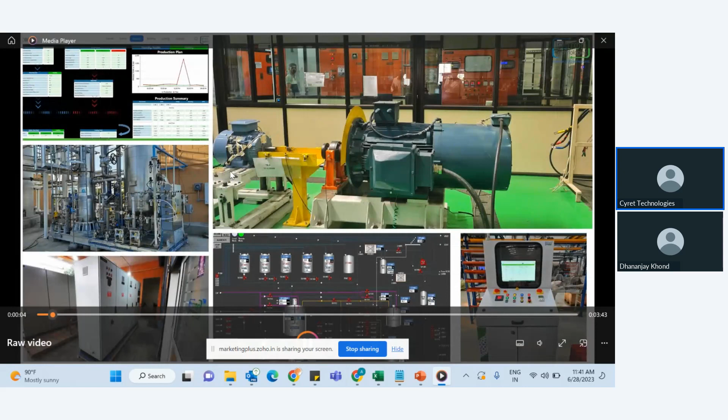Products and solutions for domestic and international customers, for manufacturing industry, for process industry, and also research laboratories. And we could do this because of our in-house cross-domain expertise, rich experience, and dynamic team.

Instron was incorporated as a proprietor firm in 2013, and Instron Technologies LLP was formed in 2016. Based out of the industrial hub of Pune, Maharashtra, we have served 200 plus reputed clientele, and now we have incorporated Instron Technologies in Canada to serve the North American market. This makes us an MNC with Indian origin.

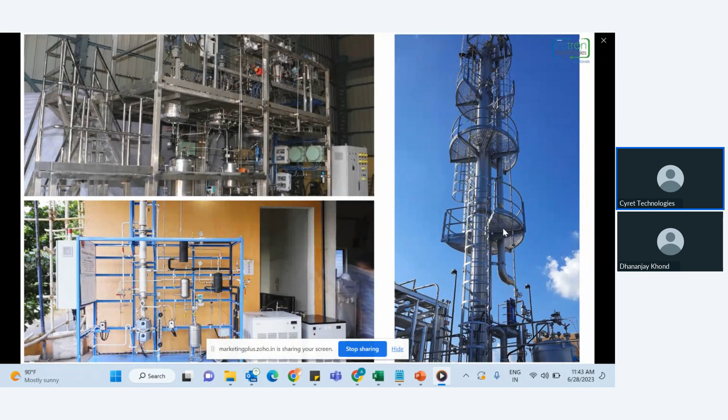Instron Technologies offers products and solutions into three verticals: process plants, digital factory solutions, and test systems. In process plants, we help customers right from conceptualization to detailed engineering and also complete plant supply and installation.

In digital factory solutions, we help customers monitor their critical parameters on the go by offering systems right from sensors, communication with existing PLCs, and then giving authenticated data to empower the decision makers. And in test bench systems, we provide end-of-line and performance evaluation test benches for, say, electrical motors, appliances like refrigerators and ACs, and thrusters, etc.

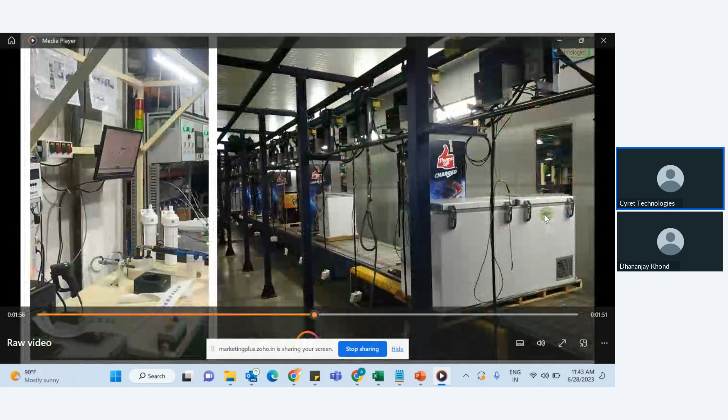Our strength is our in-house expertise in automation, IT, chemical processes, and mechanical design. We leverage it to discover unmet customer needs and provide turnkey, tailor-made solutions. Our solutions have helped clients enhance their production and efficiency to achieve their sustainability goals.

In order to accomplish our motto, let's grow together, we strive to foster a family-like environment within our organization. This has aided in strengthening the bonds between team members, instilling a sense of responsibility for all we accomplish, and increasing employee retention over time.

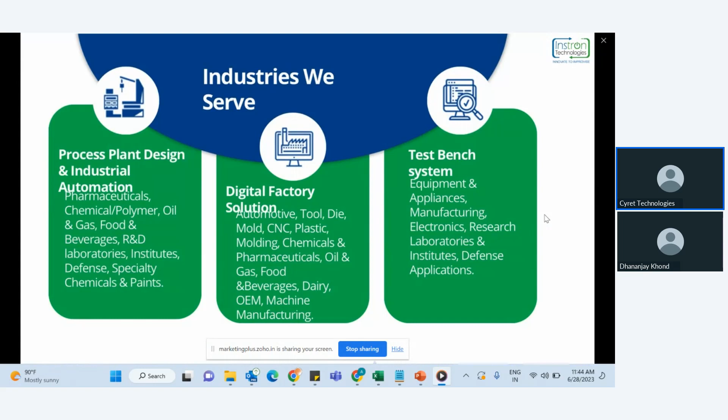We at Instron Technologies innovate to improve operations of customers worldwide in manufacturing industry, process industry, along with research laboratories, to be a known face in specialized products and solutions in Indian industry, in process plant systems, digital factory solutions, and test bench systems. We offer integrated solutions for various industries.

We have been recognized as one of the 10 most promising industrial IoT solution providers. We are ISO certified, and we also got selected for DRDO Technology Development Fund and iDEX Initiative. With this, we look forward to expanding our expertise in Canada, Australia, Sri Lanka, and Thailand. We have developed a young and dynamic core team and execution teams to help achieve the organizational goals. We strive to achieve the philosophy of growth at individual level and also at organizational level, which is why we have leaders in our organization guiding day-to-day decisions.

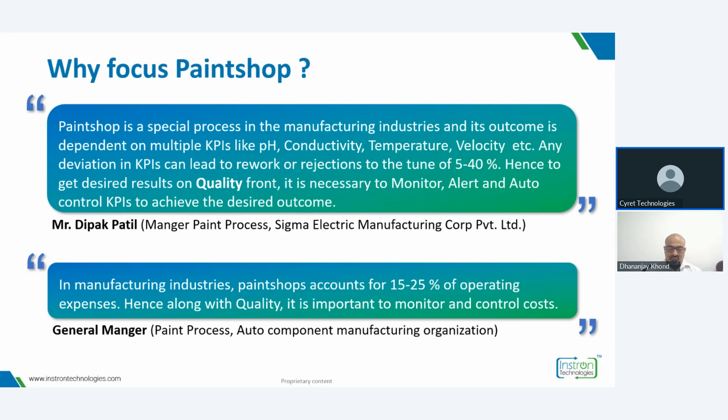There is one more industry expert who is anonymous, and he is the general manager in an auto component manufacturing company. In manufacturing industries, paint shops account for 15 to 25% of operating expenses. Hence, along with quality, it is important to monitor and control cost. So there is a balance of quality as well as the cost part of it. That's why we thought of taking today's discussion around paint shops, and how the latest trends and technologies can help users improve their paint shops.

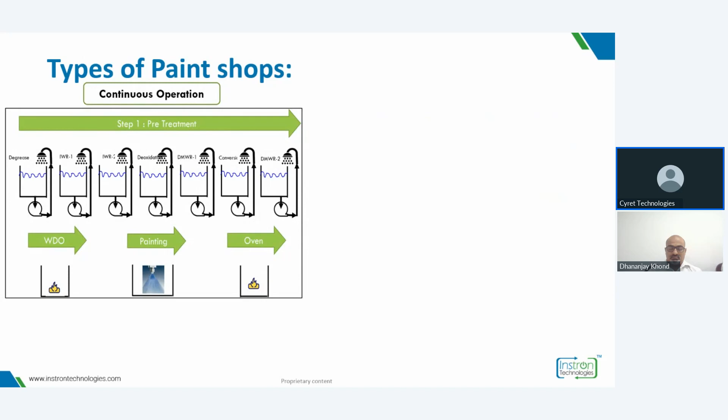To start with, we wanted to highlight the different types of paint shops we have come across. Typically, we try to distinguish these paint shops into continuous process or batch process. The difference is, in continuous process, the components to be painted are mounted on conveyors and they flow seamlessly from the first tank of the pre-treatment to the last tank of the pre-treatment, and from there it goes to the water drying oven, painting, and then baking oven.

As against that, in the batch process, it's a basket in which all these paint components are mounted, placed, and then this basket is moved from one tank to the second to third in a predefined sequence. And as usual after that, there is water drying, painting, and oven, depending on the process that particular company goes through. So these are the two major differences, or two types of the paint shop.

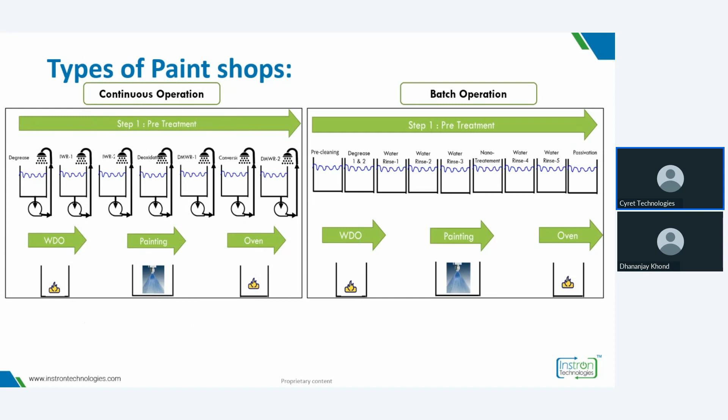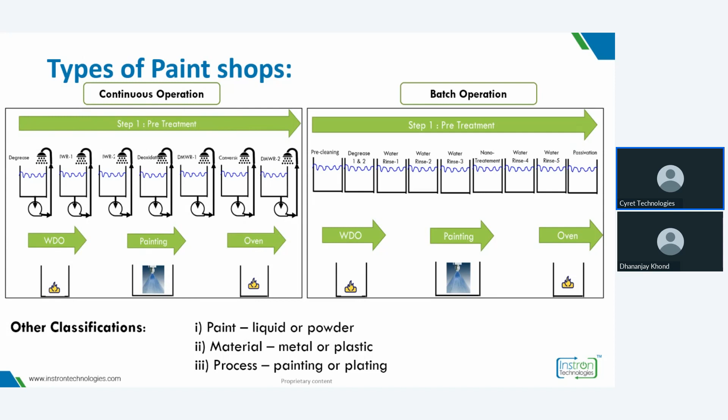Apart from that, other classification criteria could be the liquid or powder to be used for the paint shops, the material on which the paint is to be coated, which is metal or plastic, and one more criteria could be whether it is plating or painting. There may be many other types, but having gone through all these different types of paint shops, what we have understood is the critical parameters for the paint shop.

Paint shop can be classified into three segments: pre-treatment section, painting section, and baking oven section. For all of this, the critical parameters can be divided further into quality parameters, costing parameters like the utility, and productivity parameters. As paint is aesthetically important, quality is the first and foremost parameter, so we have taken it first in the sequence.

For example, in the pre-treatment section, what is important from the quality point of view is pH, conductivity, and temperature. If it is a batch process, then it is dip time. And if it is a continuous process, then it is the water spray pressure.

These are a few of the parameters. There could be many more varying from customer to customer based on their pain points. But moving on to the painting operation, the critical parameters from a quality point of view are air pressure and gun program. For the baking oven, it could be the temperature of the oven, conveyor speed, and temperature of the flue gas.

So these are the quality parameters. I'm sure most of you will agree that one or two of these are applicable for all of you, and there could be a few more. But apart from the quality parameter, there is a second one, which is the costing part, the utility consumption. So what are the typical utilities across the paint shop?

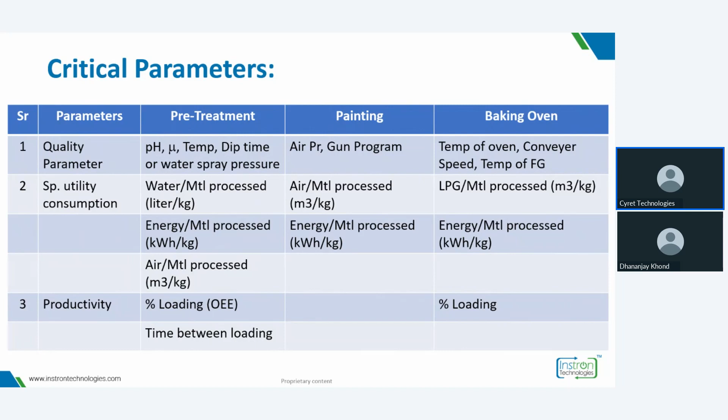So in terms of the baking oven, what is my percentage loading? That is another parameter. So these are the different critical parameters in pre-treatment, painting, and baking oven sections for quality, costing which is utility, and productivity parameters. I'm sure you will have a list of a few more parameters, but yes, these can be relevant for the individual customers we come across.

Now, moving to the next step, during our initial observations across different manufacturing and auto ancillary industries, what we have seen is these critical parameters are measured once or twice in a shift. And that is very much true for tier 2 and tier 3 customers, users of the paint shop.

So what are the methods they use to measure these critical parameters? Very simple or basic methods like litmus paper, the titration method to measure concentration, the temperature gun or display, and pressure gauges. As you can see, most of these are analog devices, and people can see the local display of that.

If any of these parameters deviate and are ignored, it leads to complete rejection or rework, hence a loss of man, material, and money. For example, if you measure the pH of a particular tank, let's say it needs to be between 4.5 to 5, and you measure it at the start of the shift and dose a chemical accordingly to maintain that range.

What happens until the next measurement, over the period of 8 hours, is during the course of production this chemical gets depleted and your pH deviates. Because of this, you will see paint defects, and what it means is you had spent so much man, material, and money from foundry to the machines, finally bringing it to the paint shop, and just as you are about to invoice, there is a rejection. This rejection, to the tune of 5 to 40%, is a big loss for any company.

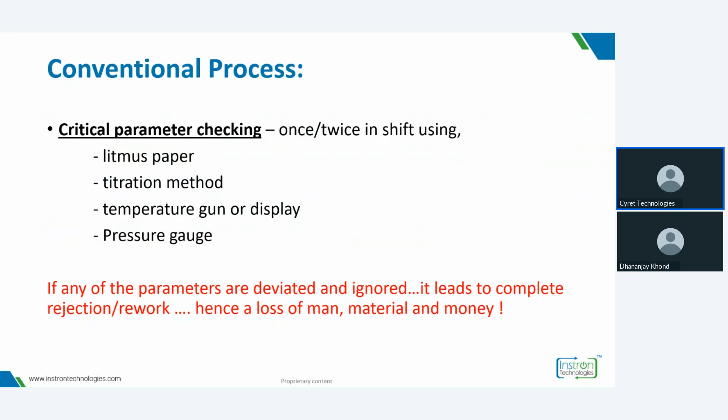So what can be done? What can be done with the help of this latest technology, or the traditional technology along with the latest technology, is you can use this IoT based system. So what is this system?

This system, as you know, Paintshop is an amalgamation of different systems like pretreatment, baking oven, paint shops, all supplied by different vendors. All of them may be automated, all of them may have PLCs and HMIs, but the problem is they are not talking to each other, and that's where the IoT system can play a good role.

So what we are saying is your existing automations like PLCs or HMIs can come to the gateway panel. And along with that, based on our surveys and discussions with your team, we can identify the pain points.

The pain points could be solved with the help of some additional sensors like pH sensors, conductivity sensors, temperature sensors, weight measurement sensors, air or water flow sensors, and so on in the pre-treatment zone. Apart from that, in the furnace zone it could again be weight sensors or gas flow measurement, speed, and kWh.

And in the powder or liquid coating section, it could be weight, air pressure, gun program, and limit switches. So any additional sensors along with your existing system can talk to the IoT gateways, and from the IoT gateways all this data gets stored into your server.

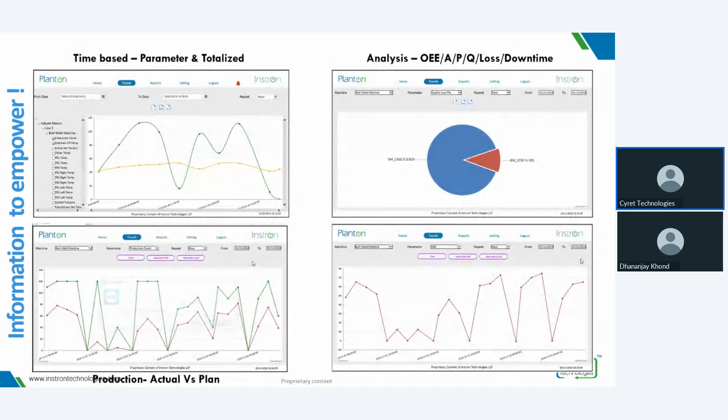So what could be the benefits? He can use it for root cause analysis, multiple trends, like one parameter versus a second parameter, and all of that.

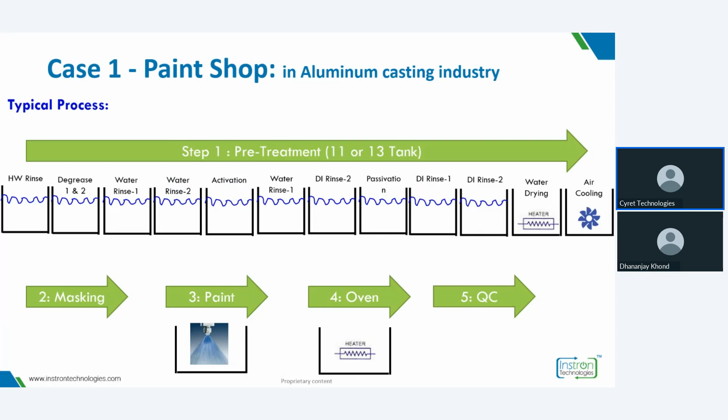Quickly taking you through a case study for a particular aluminum casting industry that we audited for 2 days to understand their process with the help of pH sensors, flue gas analyzer, and few meters. What we understood is they had offline measurement of critical parameters, and there was a big deviation that we measured over those 2 days.

There was also a reduction in productivity because there was no monitoring of process parameters like dip time and loading time. So what we did is provide this system and bring in all the critical parameters, also providing new sensors like pH, flow meters, and pressures.

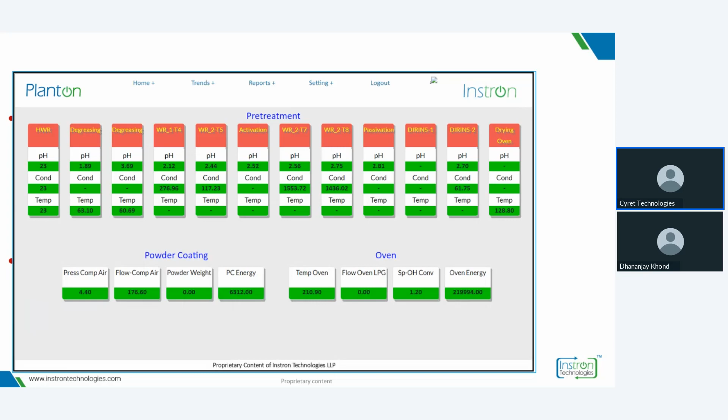And these displays were available throughout the shop floor. So after that, customers started getting alerts and started getting this kind of unique batch report. For every batch, they can get the batch number and the product data.

For all the tanks, they can get the critical parameters. Also, they can see the weight for that particular batch, the time for that batch, and the water consumption and energy consumption. So much data in one short report helps the customer do better analysis.

What resulted is improved quality due to timely draining and dosing of the tanks. It also helped the customer improve the number of batches, that is the productivity improvement, not only in the paint shop department but also in the previous department, which is the machining shop. So machining shop was giving the material at the right time so that customers can process the products in the right time.

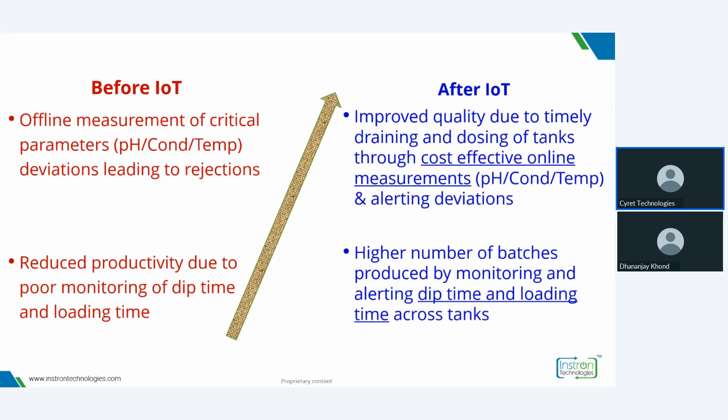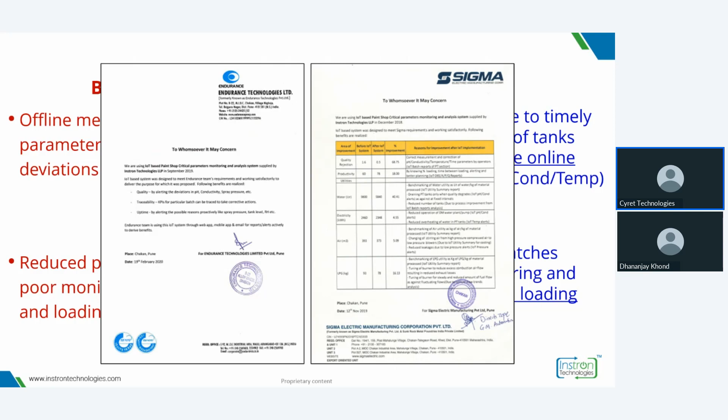Eventually we implemented this system across a few of our reputed customers like Endurance and Sigma Electric. So as you can see, the customers have not only benefited from the quality perspective, but also the traceability and the uptime. Going further, a customer at Sigma, a particular paint shop user, reported an improvement in the energy, water, and also the LPG consumption. These are multiple ways in which the customers have improved not only quality but also the cost aspect of it, and that has helped the customer achieve his investment payback within 1 year.

What could be the other benefits? The other benefits could be the traceability, which can be used for root cause analysis. Also for a few customers, we have seen that there is a debit that the end users put because of faults. Now with this system, the customer can defend that my product is good, something happened during the transit or the end use. So a debit of up to 0.5% to 0.25% can be reduced with the help of such systems and the data that you have. Cost optimization using benchmarking and productivity analysis and improvements.

With this, I would like to conclude my topic, the first topic of this webinar, and I request the host to take you through our testimonials where we have our esteemed customers with us. Thank you, Milind.

Nothing illustrates a use case better than a case study on how traceability, cost optimization, and productivity can all be achieved with IoT. The permutation and combination of key parameters was complex, but it's pretty important to understand because some of the combination of parameters is common in every paint shop. Being able to see trends over mobile and alerts on phone, this is as simple as it can be to ensure faster adoption and leveraging the system in day-to-day transactions.

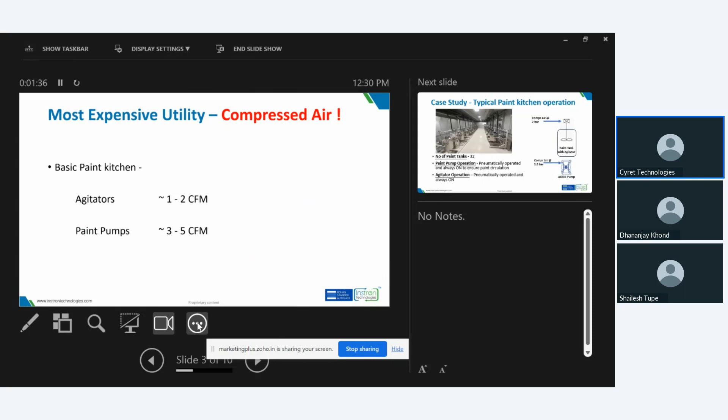Moving forward, we are now focused only on the paint kitchen. This is where your paint preparation happens. In this particular case, we have taken a situation where we have got agitators and paint pumps. We have not looked at any other further pneumatic consumption — there is lots that can be looked at, but I want this to be very basic so that everyone understands. Even if you are using a simple diaphragm pump or a piston pump or whatever to drive your paint forward, the compressed air that you use is generated — it is an indirect source of energy. Compressed air is today, I think, one of our most wasted consumables across India, across the country.

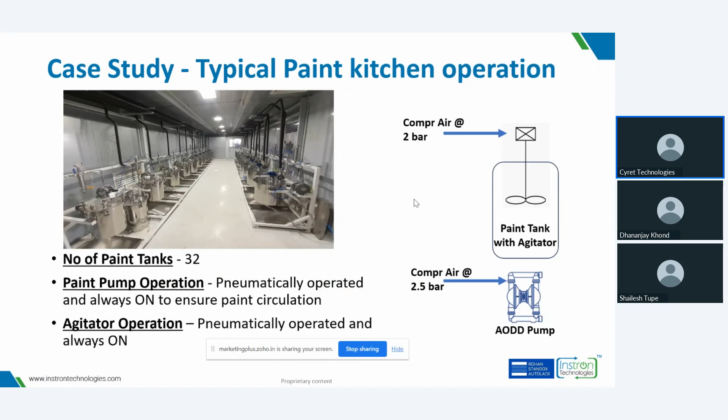Now if you look at what I'm showing you on this slide, this is a typical paint kitchen where paints are prepared. In this case, you have 32 tanks, agitators on those tanks, and pneumatic simple diaphragm pumps. This is primarily for tier 1, tier 2, and tier 3 companies — you are not talking about the OEM here. OEMs work on a different basis.

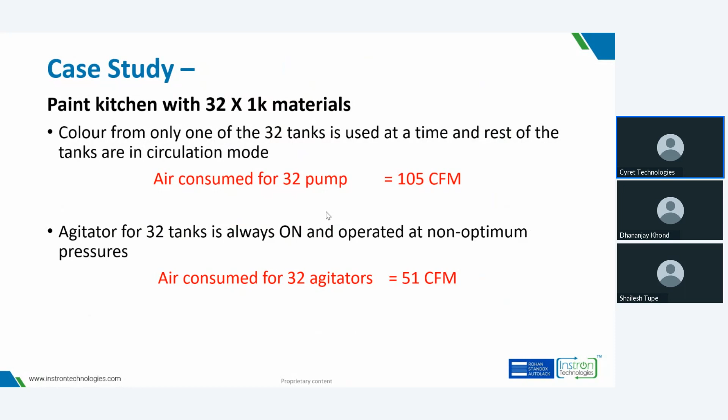Moving forward to the next slide, we have taken an example — a simple case study where we have got 32 AODD, air-operated double diaphragm pumps, and 32 agitators for those materials. The consumption of all these 32 pumps is 105 CFM, cubic foot per minute of air, and for the agitators it is 51 CFM. So this gives a look at what your consumption is. These are kept always on because you have circulating lines — you do not want the paint to stand still. Maybe once a week or once in 2 weeks, depending on your maintenance schedule, you will flush the entire line and recharge it. So this is how it normally happens.

This is the regular operation where you have 2 bar supplied to your agitator, 2.5 bar minimum supplied to your diaphragm pump. These are operating at your 2 bar pressure, which will give you X amount of RPM for your agitator, and it will drive your paint. 2 to 2.5 bar is what the AODD pumps require to drive your paint.

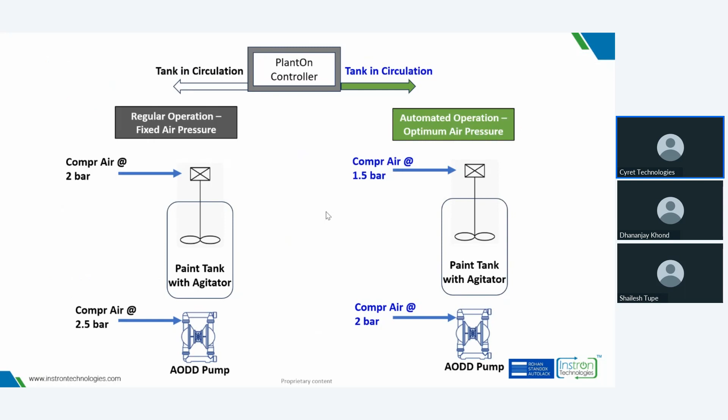Now, the payback of these systems we have calculated is within a year. I'm giving you some highlights. Compressed air is by far the most wasted consumable across industries in India today.

It is also an indirect source of energy, requiring generation, storage, piping, drying, with air pressure losses at each stage. They say there is an almost 50% loss of air pressure on every 90-degree bend in piping. Due to the high cost of electrical energy required to process all of this and to get your compressed air, if you are taking power off the grid, the industry standard calculation is 1.6 times the cost of electricity for a unit of compressed air.

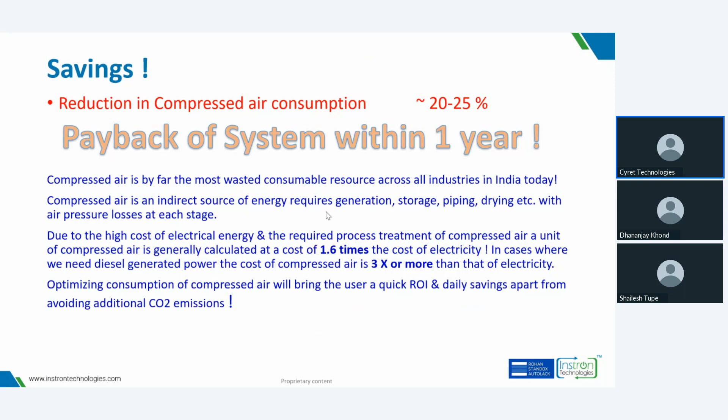When you go into situations like we have in Maharashtra, where lots of MIDCs run, many factories run on generators when there is a power failure. At that point, the cost of compressed air becomes 3 times more, or more, than the cost of electricity. So optimizing your consumption of compressed air will, of course, bring you a quick daily saving, as well as a saving in CO2 emissions.

Let us do some very quick mathematical calculations.

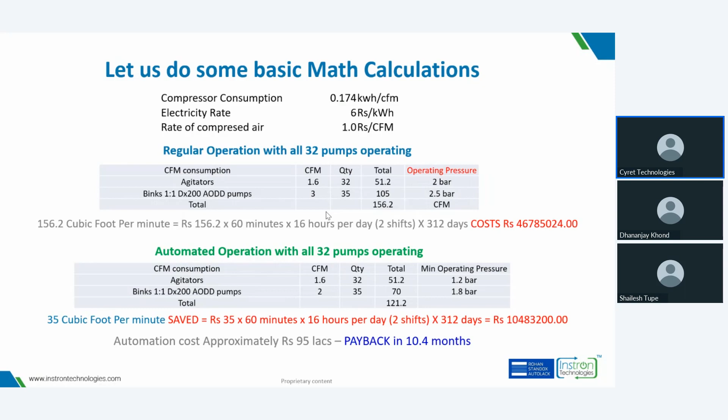If you are paying 17 rupees a unit for your electricity, this payback will come down to 4 months, not 10 months. So keeping that in mind, I wanted this to be the highlight of our discussion. Compressed air is something that is wasted very easily, and its importance is not even noticed. There are several factories that, after we have done this automation, have gone on to their piping of compressed air and stopped leakages because they have understood the importance and value of compressed air.

We leave this open for questions if any. I would like to say a sincere thanks again for your participation, and I will give it back to our host to take us forward.

Thank you very much, Ian. That was a great process that you set up there. You brought out this spotlight on compressed air and how it can lead to quick ROI and daily savings, not to mention the reduction of carbon footprint.

CO2 emissions are not just environment talk, they are closely tied to brand sustainability and brand value. Customers are now very conscious of the value in how a product is produced and what carbon load it is carrying. So kudos, Ian, for bringing in a new perspective and a paradigm shift in how every operation can be energy optimized by considering minute details such as compressed air and electricity.

The PLC controls can give you a payback in crores. Wow, that was mind-boggling. And money saved is money earned, this is a good principle. So thanks for sharing your recipe with all of us.